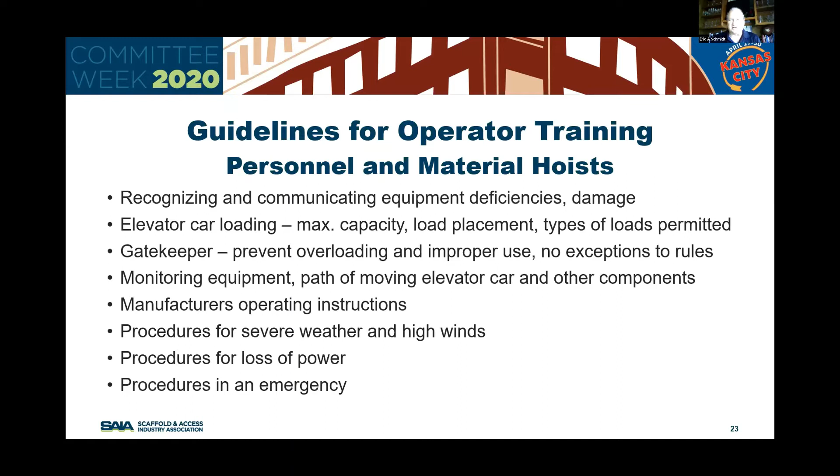We're going into the current status of ANSI ASSP A10.5 material hoist standard. For a couple meetings now, we have talked about this standard, the safety requirement for material hoist. This standard has been in a rewrite process, and it is coming to an end.

As of its current status, as of April 15, 2020, it began a recirculation ballot with all the main committee members for review and addressing comments from the public review. So in the standards process, you have the subcommittee and then the main committee. It goes out to public review and comes back, and any comments that are made have to be readdressed.

So right now it's a 30-day voting process. In this process, members who voted prior to public review can either change their vote, do nothing so their original vote remains in place, or vote if their previous vote wasn't counted. In the last vote, there were no negative votes, all were affirmative, but quite a few members did not vote. We're hoping they'll vote affirmative, give suggestions, or abstain if they have no input.

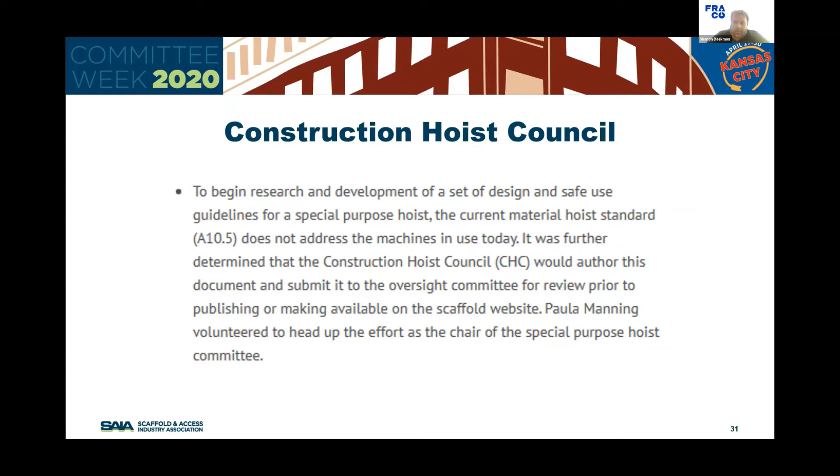We were very fortunate in that process because we kept getting shot down as we attempted to get into the ANSI standard, and we were basically faced with the possibility of having to create our own consensus standard for the types of equipment that did not meet the original 10.5. So being able to work within the A10 group and make modifications that would cover the existing material hoist and the other equipment out there in the industry was definitely beyond our expectations - it was our highest hope, I guess you'd say.

So some of these new changes, I'm just going to briefly talk about two that will really impact people here in the council and in the scaffold industry, and it has to do with special purpose hoists. So we developed definitions - we have the special purpose hoist. These are now accepted into the standard, the machines are going to be part of this standard.

A material hoist that is specifically designed and designated to be used in special applications. So what are special applications? These are material hoists that have been applied as tools of the trade, machines that weren't part of the standard before. Many of the people here in the council have these type of products, and these are the type of products we're talking about - these small material hoists.

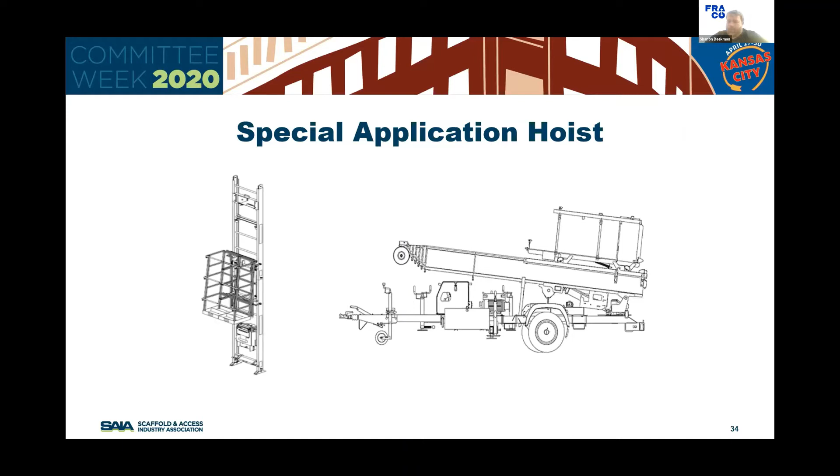Before people get nervous about this, some of the things that were in the 10.5 standard weren't really focused around these type of machines. So we did make some adjustments, and we'll talk about that in a bit. But for these type of machines, as a special application hoist, it follows two paths.

There's a special section in the standard that talks about installation of temporary structures, like scaffolding. A lot of these machines were used during the installation of scaffolding as tools of the trade. They'll still follow that path, but now have a home in a particular standard. Some states and jurisdictions were having problems with people using this equipment because it didn't have a home, so we've created one for them within the standard.

These types of tools are now considered tools of trade during installation. If you think about the installation, you have authorized installers installing the scaffolding, but you don't have general workers on it. It's not until it's been installed and inspected that you allow general workers. Once general workers are to access that scaffolding, you have to put in place certain things to make these pieces of equipment, if you want to leave them on the job site, comply with the rest of the standard.

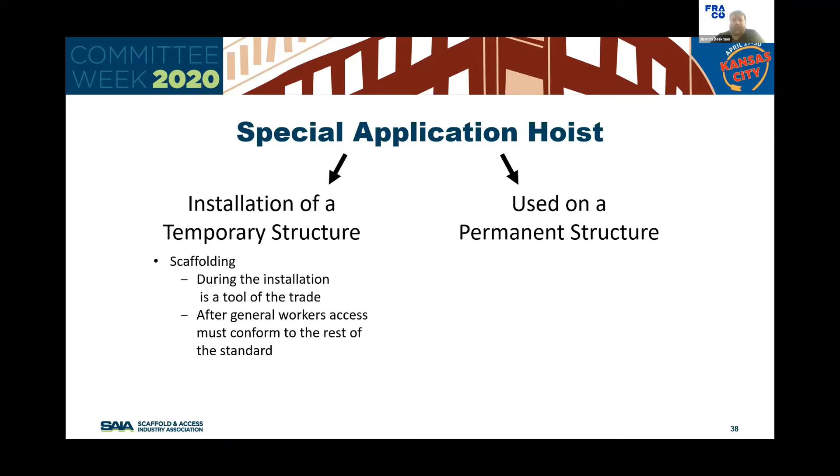The other path is used on a permanent structure. There are cases with pre-existing, standalone structures where you have a single user moving specific material, which we can consider a tool of the trade. Think of a roofing job where you're only moving material from the ground to the roof. In the current standard, you'd have to add a whole bunch of guarding that's probably not even necessary for the actual job, when you have just one trade using this hoist to move the material they need.

The other thing is, to specify between a special application and a permanent structure setup, we have to limit the stopping of this machine to a two-stop system. It's only going from A to B, that's it. You're not going to all these different floors moving a bunch of material. The only thing you're doing is moving one group's, one trade's material to one location.

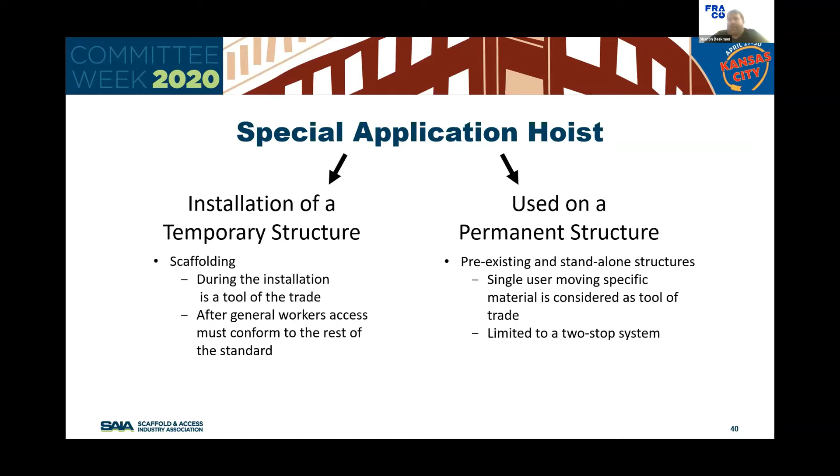That's this section of special application. Now, there are some things with special applications that are omitted, unless there are hazards to general workers. When we talk about items that have been omitted, we're talking about hoistway enclosures, base enclosures, access to landings, the operation station, and position indicators. Those are sections of the standard that during a special application aren't needed because other means are being used to protect that area during the installation or removal of material or installation of a scaffolding system, to protect the general workers from those hazards.

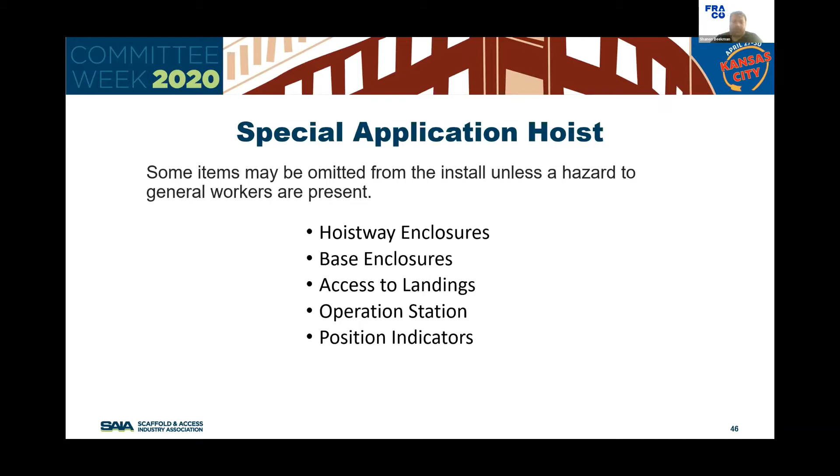Part of the special application hoists, the smaller hoists, when left on the job site, have some things that aren't the same as the larger rack and pinion material hoists. So we were able to add another definition and classify some of these machines as light duty portable material hoists. These are machines that are 1,000 pounds or less, your smaller machines. With that, they have special established variances within the standard for items that aren't the same as their larger counterparts.

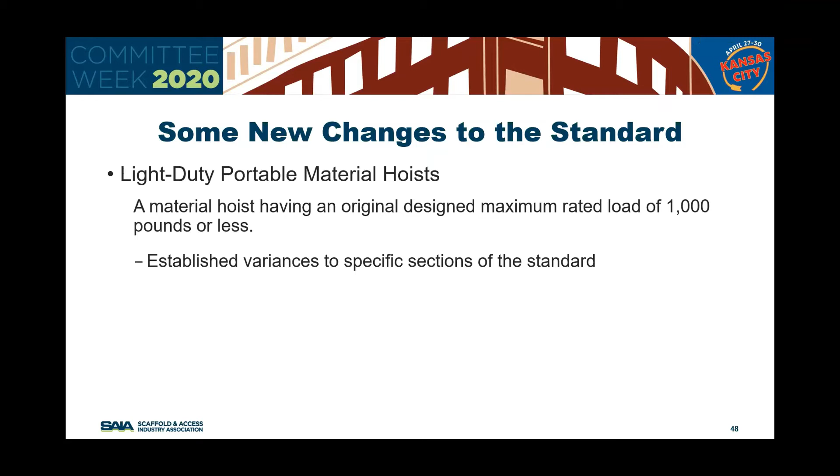These have all been looked at, and a lot of us went through all these different details to make sure we covered things properly, so we weren't hurting the industry by adding these in, but helping the industry. Part of that, those variances have to include overhead protection, car resting device, and testing of these machines. So there are variances already established within the standard for a machine classified here.

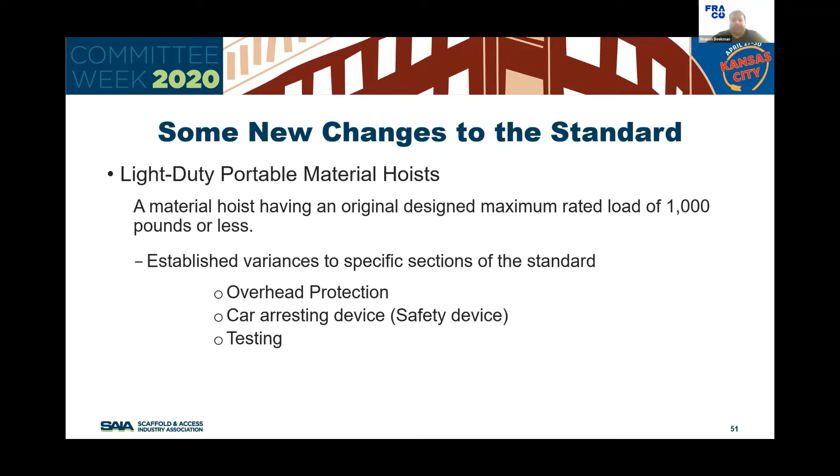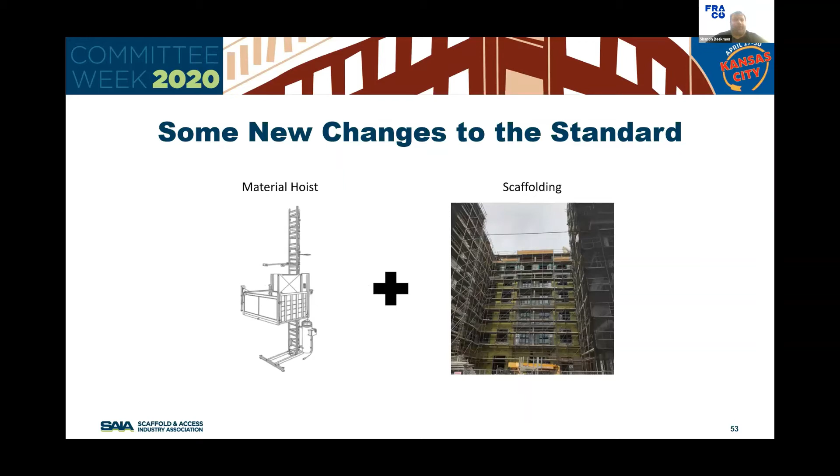So another thing to add: if you have a company that installs a material hoist and attaches it to scaffolding, a question I have for the council is, how do you meet this section of the standard? This has always been an issue for a lot of places - some had to get special variances, some had to stagger the landing door, so they skip levels of the scaffolding.

So that was one of my questions I was trying to bring up. Somehow my audio got turned off.

How does that apply to our typical hoist attachments for scaffold that we have, like on our mast climbers? Or does it? We've been having cranes and derricks issues with our hoist attachments that go on our mast climbers. Would these suddenly somehow fall under this standard, or does that not apply?

As far as a mast climber, are you classifying it as a material hoist? No, he's talking about the wire rope hoists that are tied. Oh, okay, you're talking about wire rope. No, that falls under a different standard. These are guided material hoists.

Your overhead hoists, crane type hoists, those fall under the B30 standards for those applications. Those are unguided systems. The A10.5, everything is basically mast guided of some type. That answers my question. That was my question - does it have to be something mast guided? I didn't see the whole definition of the special purpose hoist, so I didn't know that was a requirement, that it was mast guided or what.

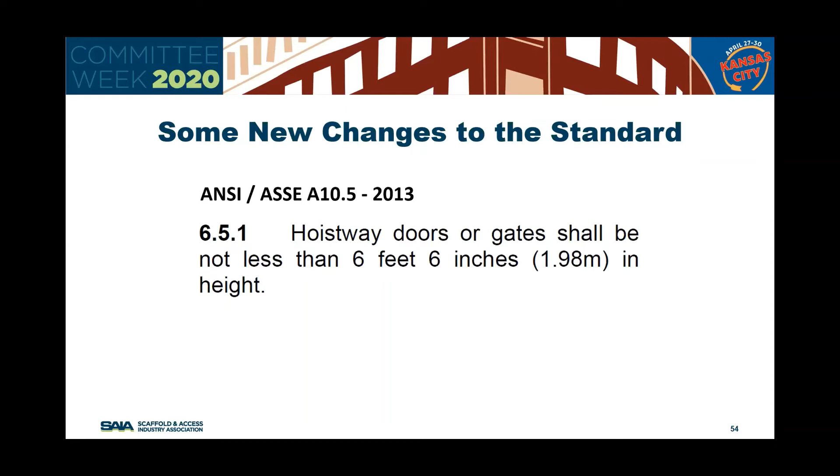So in the current standard right now, hoistway doors and gates must have a 6'6" opening to be compliant, and for many scaffolds that is difficult to do. So what we have done is we've added a section called reduced height doors and gates. This is a practice that was done with EN standards in Europe, and we brought the concept over into the US because of the situation of not being able to fully comply when it comes to scaffolding.

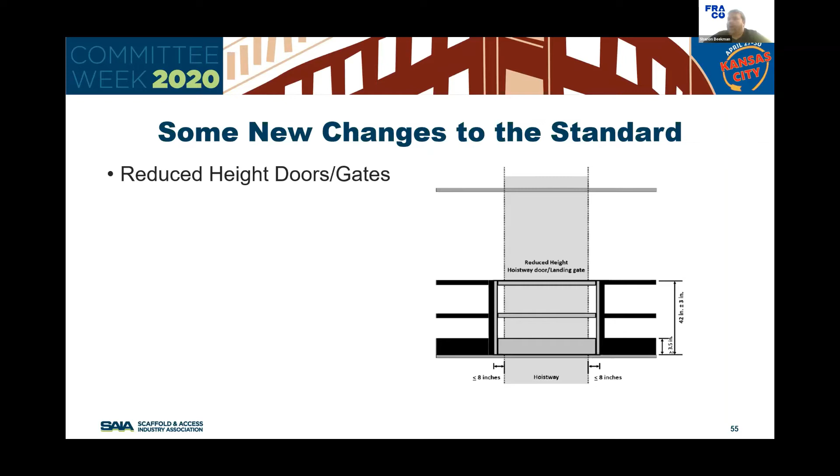Not all scaffolding - some yes, some no. So we added the reduced height doors. We have certain requirements for it. I'm not going to go into full detail, but this is a new thing. For everybody here that has a material hoist attached to scaffolding, and we get the adoption from your local jurisdictions, this will be very helpful for you guys to install these machines.

Part of that is we have to always think about the safety of the general worker that is on the scaffolding and around this machine. So if we're eliminating a full height barrier on scaffolding and going to a half gate, we've got to at least create a landing restricted area that blocks people from accidentally walking into or reaching into the path of the hoist. So there's guidelines for this, with some limitations to speed, but it allows us to create a whole new level with using these machines.

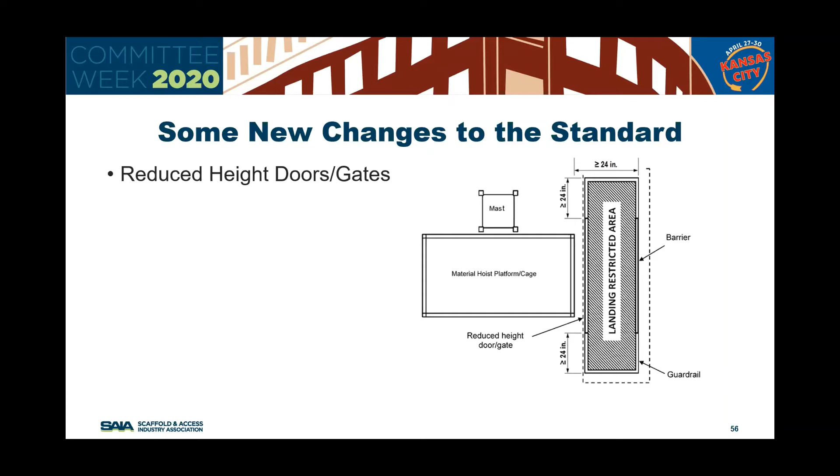After the publication, we would like to begin creating an industry awareness document with guidelines on how the new A10.5 standard for material hoists will affect the industry, because there's going to be a lot of questions. There are a lot of new things, new concepts and practices that we've introduced into this standard. We brought the standard up to what is happening day in, day out on job sites right now with this type of equipment. So we're going to be looking for help from people to help lay out these guidelines and everything.

After this 10.5 gets the final vote and gets published, the ANSI ASSP subcommittee, the A10.4 personnel hoist, is going to start its new rewrite. We plan to make some changes to it as far as the way it's laid out, like we did with 10.5, and add things. We're looking for feedback from council members who may have had issues in local areas concerning sections of the current 10.4 standard.

We need that feedback because the changes that happened with the 10.5 all came from feedback that we received from the council. We put it into a document and brought it to the table of the subcommittee of the A10.5, and there has been a lot of agreement. So it all started from our council with these changes that are happening.

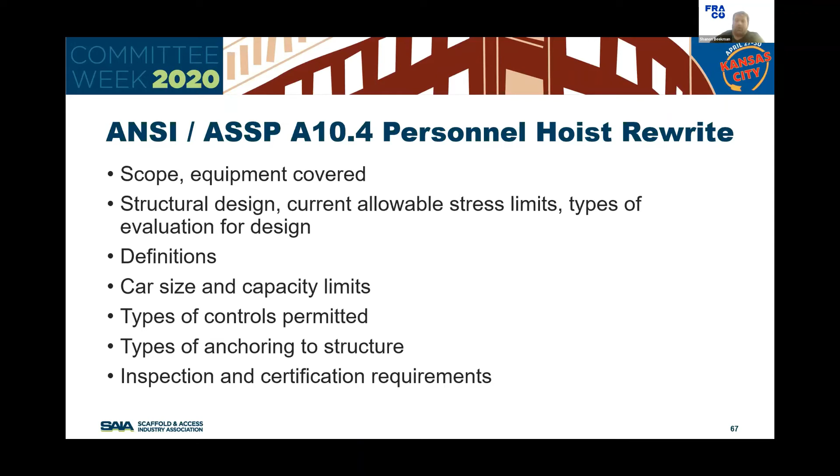And then new discussions, are there any new topics or courses of action that the members would like to add to the Construction Hoist Council's agenda? We're getting the 10.5 now coming to the end, to where we've met that goal of increasing for special application hoists and finding a home for these types of products. That's coming down. What other things could we add back into our agenda to now focus our attention to? We have the 10.4, what else do we have? Anybody have any suggestions or any ideas?

Silence is good. Okay, we may have to unmute everybody's mics again. No, I mean, I think there's a lot of things that we could touch on, but it's just kind of a thought process that's just been thrown out. So give us a little reaction time there.

That's no problem. One thing I'm concerned about is how does the special application hoist go back to an A92.10 product? Is that going to bleed together? Or now that that's been added into the 10.5, is there something in there that says this excludes A92.10 machines? Is there an exclusion clause in there, or is it going to somehow bleed together, or what's going to happen there?